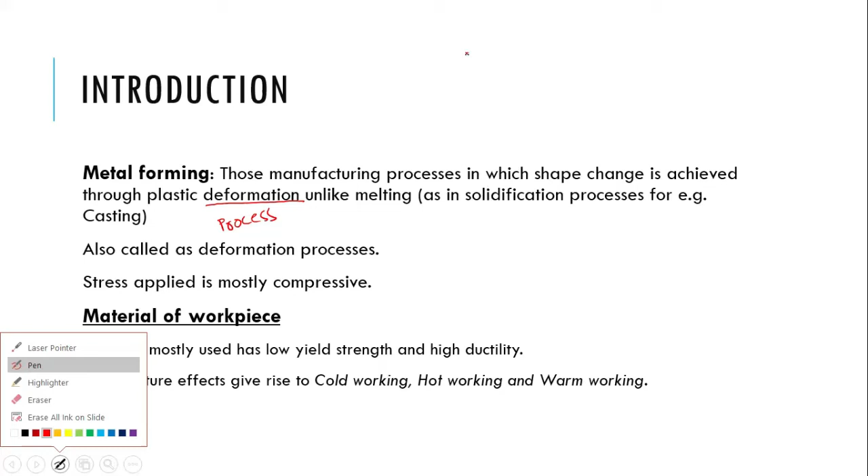In the previous chapter we were discussing shape change by application of temperature. In those shaping processes there were two methods for attaining shape change: by temperature, or melting, which we discussed as casting. The second method for attaining shape change is by plastic deformation, or by applying stresses or forces. So our second domain is the metal forming process or deformation process, in which we achieve shape change by application of stress or plastic deformation. That is why it is also known as the deformation process.

In this kind of shaping process, the stresses applied are mostly compressive in nature, while in some cases we have tensile stresses as well.

So what kind of materials are subjected to metal forming or deformation process? They are mostly highly ductile materials with lower yield strength. Highly ductile so that they don't fracture during deformation—if the material is brittle, it will not undergo plastic deformation, rather it will fracture. And lower yield strength so that it is easy for us to change the shape.

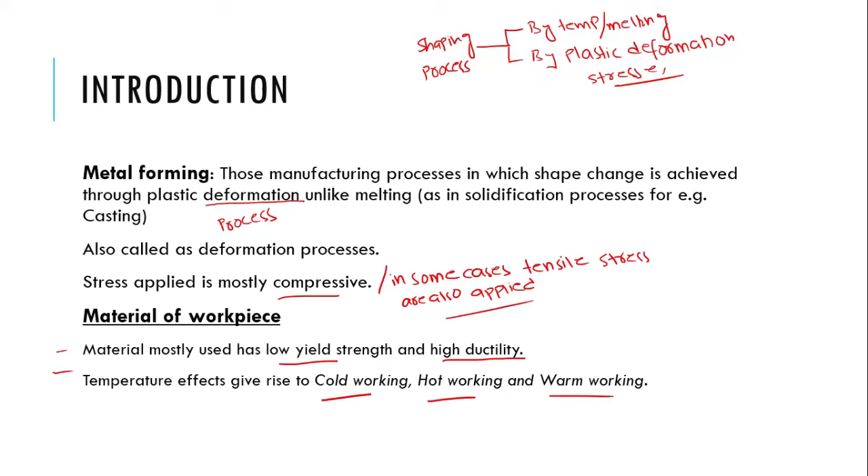Now if we see the metal forming process, it can be further classified into two types. The first one is termed bulk deformation. So the deformation process can further be classified into bulk deformation and sheet metal working, and there are further types.

So what is bulk deformation? It's a deformation that is produced in a bulk material, versus a deformation produced in a sheet, that is sheet metal. So what's the difference between bulk and sheet metal? The bulk is a material with low surface area to volume ratio, while the sheet metal is a material with high surface area to volume ratio.

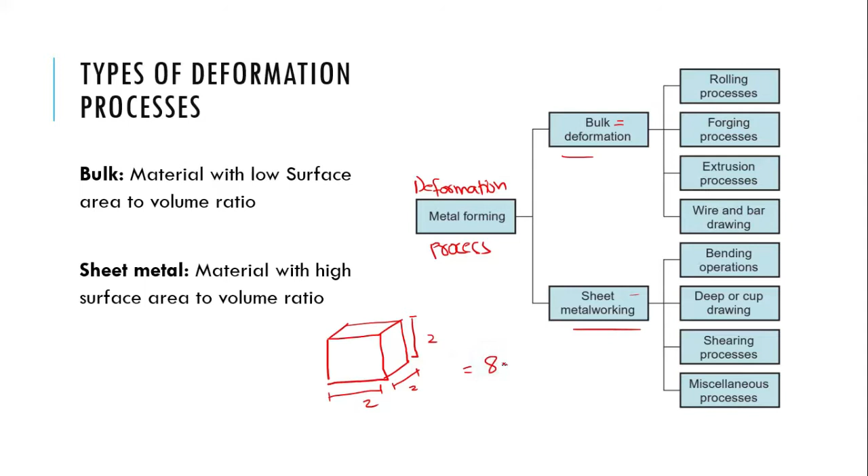What does it mean? Let's suppose you have a steel ingot—you know what an ingot is, a large bulk material in simple shapes. Let's suppose that is 2 meters on each side, so it will have a volume of 8 meter cube.

Then we have another sheet-like shape, let's suppose 2 meters on this side, 4 meters on this side, and 1 on this. So again we have 8 meter cube volume, but we know that this one has a greater surface area compared to the surface area of the bulk shape. So this is the difference between bulk and sheet metal.

The bulk has a lesser surface area for the same volume, while the sheet metal will have the greater surface area for the same volume. Although there are some restrictions on how thick the sheet can be, and we will see this when we specifically discuss the sheet metal processes.

So we have seen that the deformation process or metal forming process can be further classified into bulk deformation and sheet metal working. What is the difference between the bulk and the sheet metal? The bulk, which has the lower surface area to volume ratio, has a lower value, while in the sheet metal the surface area to volume ratio has a higher value.

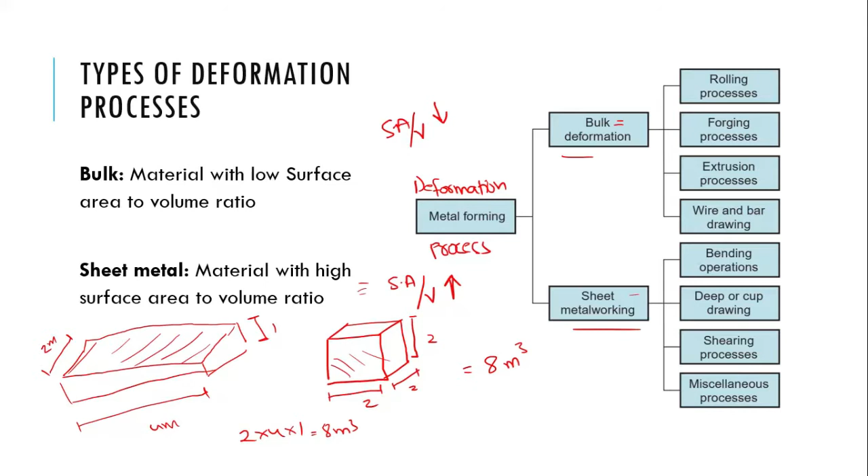Now if we refer to this chart again, we started here in the first lecture discussing manufacturing processes. In the processing operation, there are three processes. The first is where we shape the part, and there are two ways to shape it: either we melt the material and pour it into the mold, allowing it to solidify in a specific shape. That process is termed the solidification process. In chapters 10 and 11 we discussed casting of metals and further classification of casting.

Now we are moving toward the second type, the deformation process, which has further bulk deformation and sheet metal, and each of these two has its further classification. So now we will be discussing bulk deformation as well as sheet metal operations. I hope you keep track of this chart; it will help you summarize the subject in a single chart and remember the classification or interconnection between all the processes.

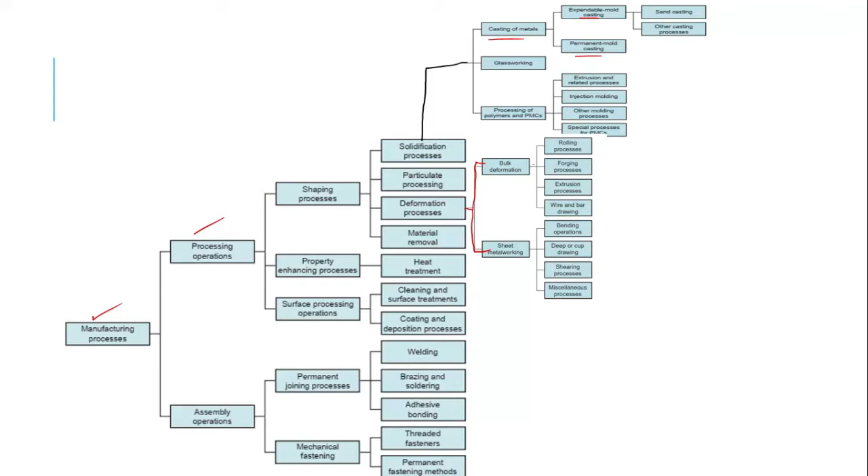Starting with the first type of metal forming, the bulk deformation: we have discussed what bulk deformation is, in which the deformation is produced on a bulk material, which has lower surface area to volume ratio. The other aspect is that they are used where significant deformation and massive shape change is desired.

In the sheet metal operation, there is not significant deformation or shape change, unlike the bulk deformation. So what are the types of bulk deformation processes? We have rolling, forging, extrusion, and wire and bar drawing. As we quoted in the first slide, in the deformation process mostly we apply compressive stress, so among these four, three of them apply compressive stresses.

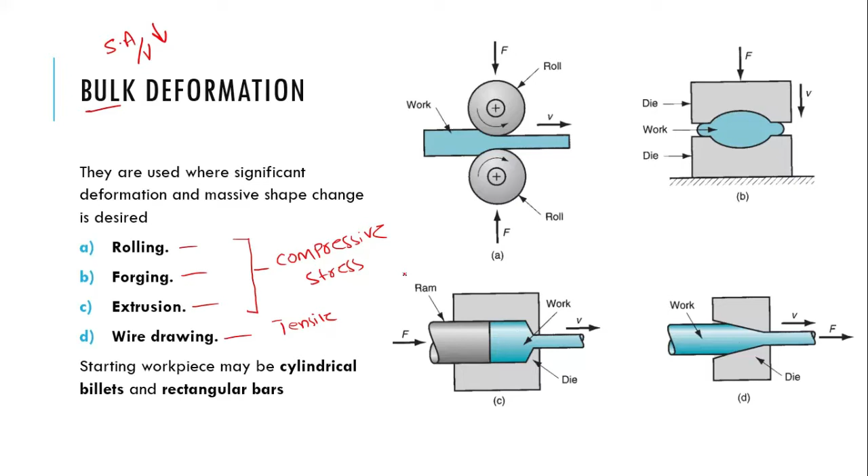The primary driving force is the compressive stress, while the last one, wire drawing, applies the tensile force onto the work part. So tensile stress is involved, but only in a few cases.

In bulk deformation, the starting material may be cylindrical billets, rectangular bars, or ingots, as we discussed earlier. This is the rolling operation, in which metal is squeezed between two opposite rolls. We have forging, where we have two dies and metal is compressed between them. We have extrusion, in which metal is forced to squeeze out of a die opening, taking the shape of the die. Or we have drawing, in which metal is pulled out of a die opening. We will discuss each one by one in the next chapter; in this chapter we will discuss some basics of all these processes.

So what is rolling? It's an extract from your course book. Rolling is a compressive deformation process in which the thickness of a slab or plate is reduced by two opposing cylindrical rolls or tools. The thickness of the slab is reduced by compressive stresses. The roll rotates so as to draw the work into the gap between them and squeeze it, with no other force involved.

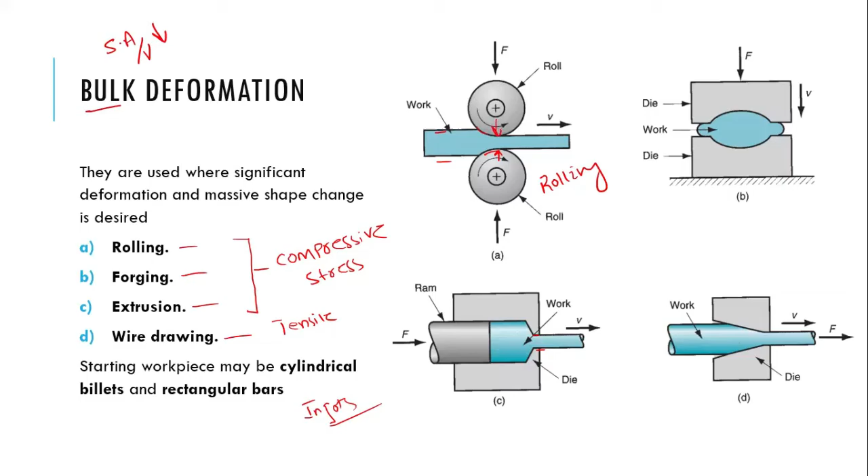These rolls pull the part into the gap, forcing it in using frictional force, and then applying compressive stresses onto the part to reduce its thickness.

The second one is forging. In this deformation process, the work part is forced or compressed between two opposing dies. We have the lower die, with the part placed over it, and the upper die which applies the stress. The lower die is stationary in most cases, while the upper one is movable. This is the work part, and this is how we perform the forging operation.

Again, all of these four processes can be performed as cold working, hot working, or warm working.

Then you have extrusion. As discussed, it's again a compression process in which the work part is forced to flow through a die opening, ultimately taking the shape of the die. So the metal is forced through the die opening, taking the shape of the die.

The last one is drawing. It's a forming process in which the diameter of a round wire or bar is reduced. The primary purpose of the drawing operation is to reduce the diameter of wires, which end up much smaller, and bars, which are comparatively larger in diameter. They are pulled through a die opening to reduce the diameter.

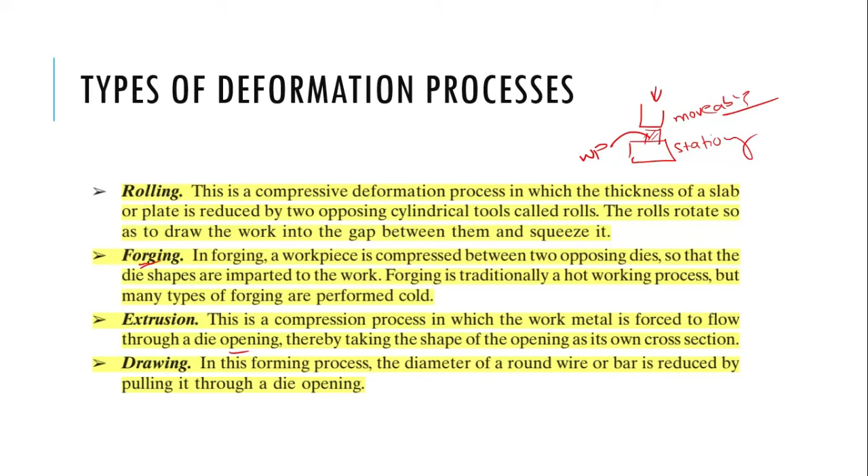Then there's sheet metal, the second branch of the deformation process. These are used where there is no involvement of significant shape change. They are metal forming and cutting operations of sheets, coils, or strips. There's not much significant shape change or plastic deformation involved, but there is some smaller amount of deformation along with cutting operations.

The sheet metal working operation is also known as press working, since hydraulic presses are mostly used for performing these operations. The product obtained from sheet metal work is known as a stamping. So I can call this one a stamping, or this angle iron is a stamping.

As there is no significant shape change involved, sheet metal operations are mostly performed as a cold working process, because they are mostly finishing processes in the deformation process. Cold working has advantages, like increasing the strength of the material, which we will discuss. That's why sheet metal working operations are mostly performed as cold working.

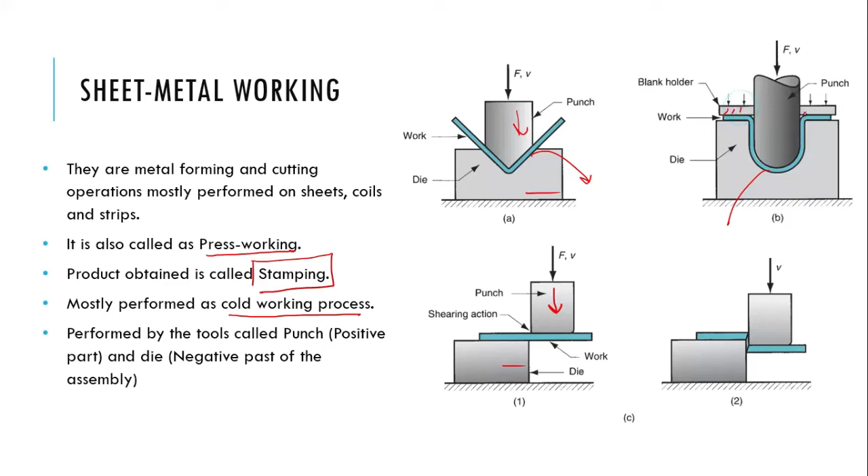Now here comes the stress strain curve. What is a stress strain curve? It shows a relationship between the change in the behavior of the material, or the deformation of the material, with respect to the applied stresses.

We know there are two behaviors of the material: elastic behavior and plastic behavior. Elastic behavior is one in which once the force is removed, the material will regain its shape. In the plastic one, it's a permanent deformation in which even if the force is removed, it will not regain its original shape. That means it is permanently deformed, or plastically deformed.

You must have seen that in the elastic region, the stress is directly proportional to the strain—that is Hooke's law. So if we start here, the stress will be directly proportional to the strain, and once the stress is no longer directly proportional to the strain, there will be a beginning of plastic deformation. That point is known as the yield point, the point from where plastic deformation starts.

It has an initial gauge length of L naught and initial cross-sectional area of A naught. When the force is applied on it, it elongates, so the gauge length changes, as you can see it is moving towards a fracture from here. So now the new gauge length for this specimen is L, while the cross-sectional area at this region is A.

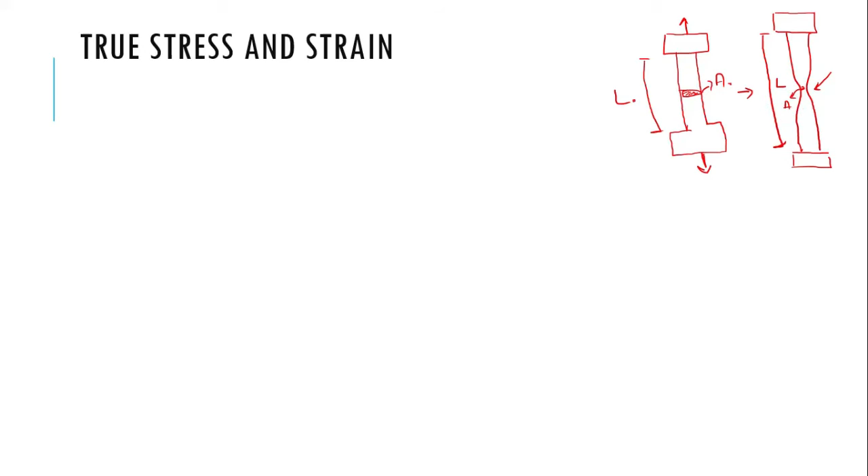So what is the engineering stress here? Stress is simply force per unit area. So which area is this, this one or this one? The engineering stress is the force applied per unit cross-sectional area, that is the initial area, the original area of the specimen on which we are applying the force.

But as we know, once the force is applied, up to the fracture point the cross-sectional area of the material changes. So the stress calculated based on the instantaneous cross-sectional area is termed as true stress. You can write it as force upon the instantaneous area, that is force divided by instantaneous area.

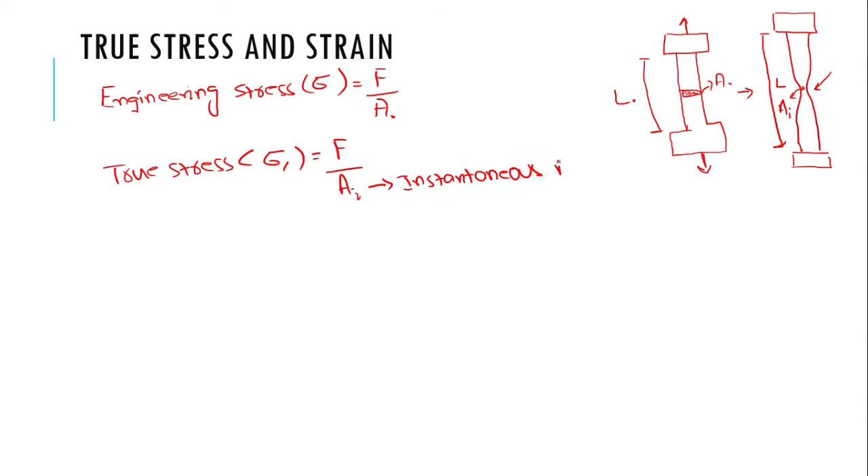If we observe it in the graph, let's suppose this is the strain, this is the stress. For engineering stress, it would be somewhat like this one. We have an elastic region, then the plastic region. But there's a possibility that for true stress we have a somewhat different value: it might go through the elastic region, then in the plastic region it will further increase, especially after the strain hardening point or UTS as we saw in the last slide. Why is that so? Because the cross-sectional area starts to reduce, and since the force applied is constant while the area is being reduced, the true stress increases further. So the stress calculated based on the instantaneous area is termed as true stress.

So what is the relationship between these two? As we know, true stress equals force divided by instantaneous area, but obviously the volume remains constant. So by the constancy of volume, we can say V equals initial area into initial length, A naught dot L naught, equals instantaneous area into instantaneous length, call it Li.

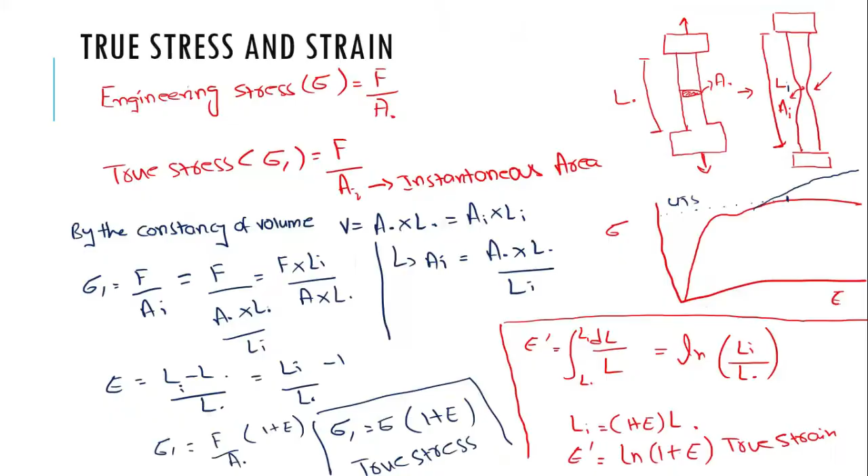So until now we have discussed two terms, the engineering stress and the true stress. Now we'll move towards the flow stress and average flow stress. So what is flow stress? In the plastic region, stress is no longer directly proportional to strain, as we discussed in the previous graph.

Let's draw a brief rough sketch of the stress-strain curve. We have strain here, stress here, and the elastic region, then the yield point, lower yield point, UTS, and necking, and this is the fracture point. This is UTS, and this is the yield point, and we have the elastic region, and this will be the plastic region.

So in the elastic region, we know it follows Hooke's law, that stress is directly proportional to strain, but that's not the case in the plastic region. Stress is not directly proportional to strain, rather it is exponentially proportional to strain. So we have stress equals directly proportional to strain exponent n, or we can write it as K times strain to the n, where K is the strength coefficient and n is the strain hardening exponent. If a material is more strain hardened, its value will increase.

But one thing we need to remember is that the stress and strain here are the values of true stress and true strain, not the engineering stress or engineering strain. Why is that so? Because we consider the flow stress in the plastic region, and that's why in the plastic region there's a shape change at every instant. That's why we consider the true stress and true strain. This flow curve was developed to define metal plastic behavior in cold working.

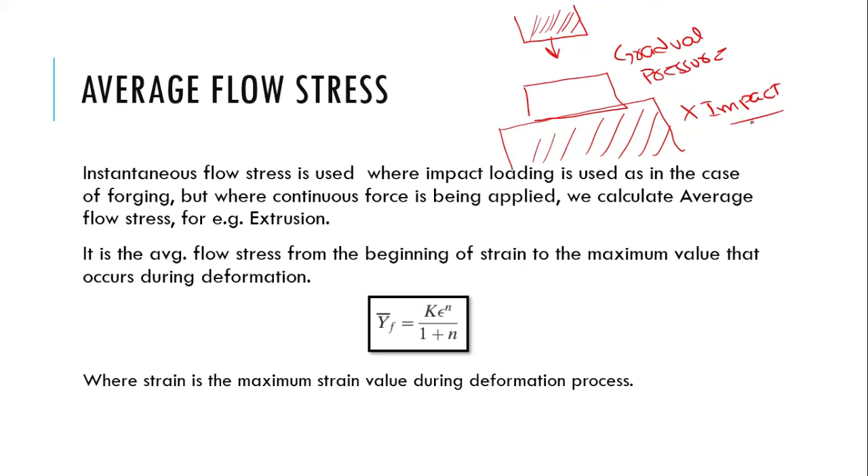It is not applying an impact. So obviously for this gradual pressure there will be a deformation in a gradual pattern. For that we consider the average flow stress. But if the load is impact in nature, we don't consider the average one, rather we consider the instantaneous stress. So basically the original flow stress equation is YF, flow stress, equals strength coefficient times strain raised to the exponent.

We integrate this from zero strain to the maximum strain, and we get YF equals that integral divided by 1 plus n. This is simply an integral of the flow stress equation, and this is how we get the average flow stress — the average flow stress from the beginning of strain to the maximum value that occurs during deformation.

The strain value used here is the maximum strain value during the deformation process, that is, towards the end of the process. What will be the maximum strain value in this case? When the material has been deformed completely into this shape, and it has been reduced to this final form, and we have achieved our final result — this will be the maximum strain of this material.

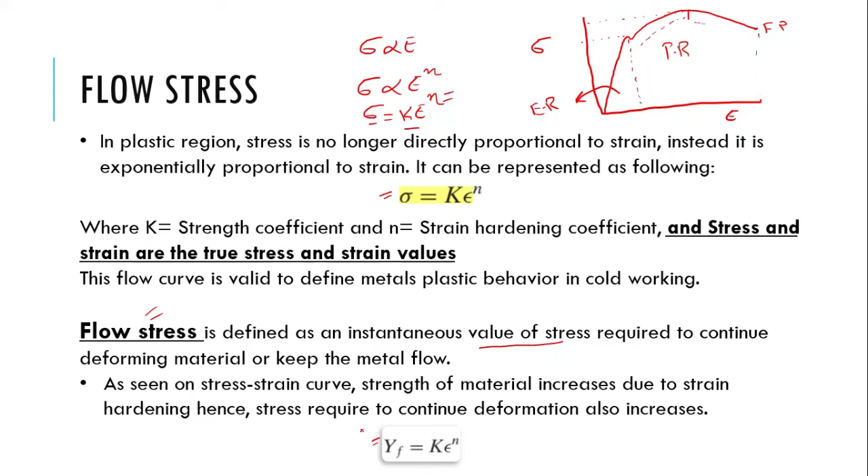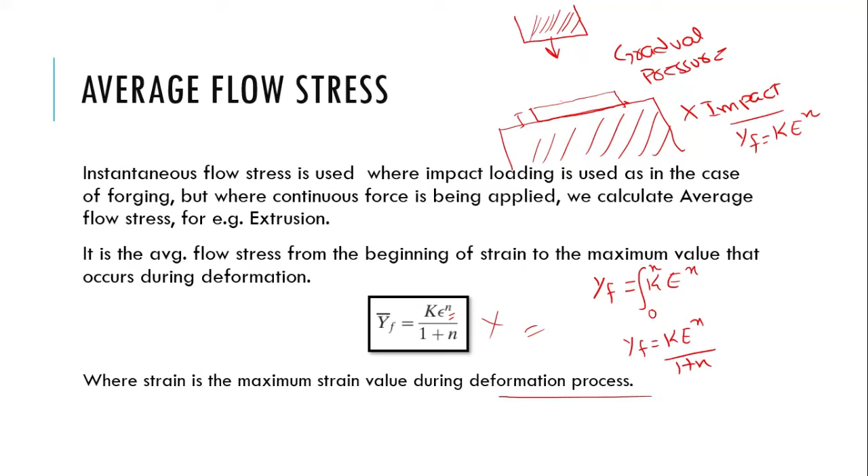Now, as we discussed in the beginning, the metal forming or deformation process — I'm writing it again so you remember they are the same, synonyms. The metal forming process or deformation process are of four types: rolling, forging, extrusion, and wire and bar drawing.

And these four processes can be performed in three ways. The first one is called hot working, or you can perform these four types of deformation process as cold working, or warm working. So all of these processes can be performed under these three conditions.

So what is cold working and why is it used, why is it preferred? Cold working is a metal forming process performed at room temperature. Our specimen is at room temperature, not in a heated form, or if it is heated, it is only slightly above room temperature — not very hot, and not even near the recrystallization temperature.

It is far away from the recrystallization temperature, so that is termed as cold working. If our specimen or the material is at room temperature, then that is termed as a cold working process.

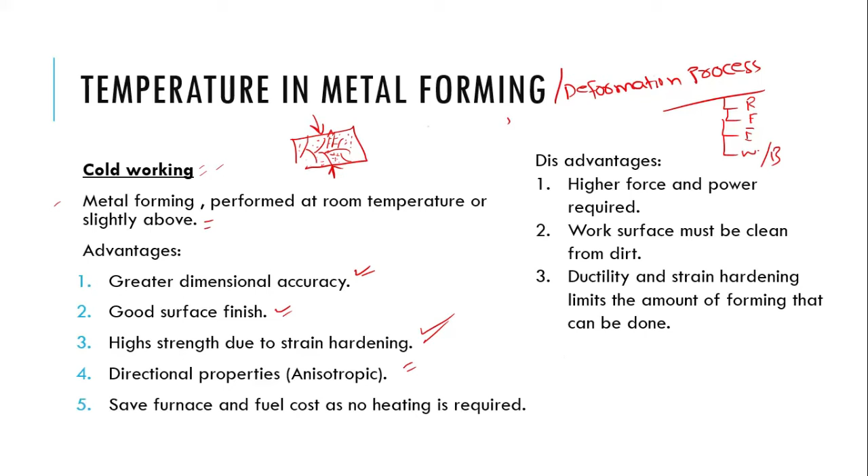There are two kinds of behavior in metallic materials. The first one is called isotropic behavior, and the other one is anisotropic behavior. It means, you can say, uniform in all directions, while anisotropic means it is directional.

What does it mean? Let's say if we have this specimen and I say it's an isotropic material, it means if I measure its tensile strength or compressive strength, in this direction or in this direction, it will give the same value. The material is behaving the same in all directions, while an anisotropic material will behave differently in different directions. It might have some value of tensile or compressive strength in the horizontal direction, or a different value in the vertical direction. So that is the anisotropic behavior.

And because of this cold working, our grains change. Let's suppose this was the original grain before it was cold worked. Now this is my specimen after the rolling operation, and this grain has been elongated like this. Now the layer of atoms is lengthier, longer than before. So it means atoms have more space to slide when subjected to force, while atoms have lesser space than before in this other direction to slide over each other.

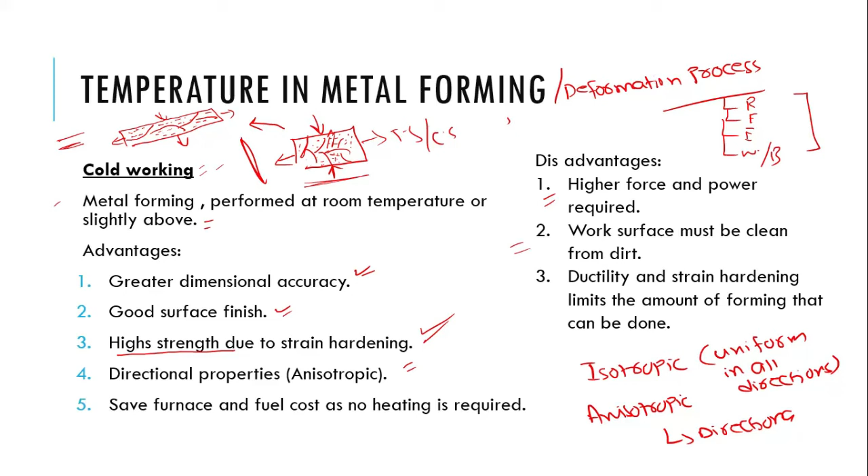If you have understood cold working properly, it won't be difficult for you to understand the other one, that is hot working. So what is hot working?

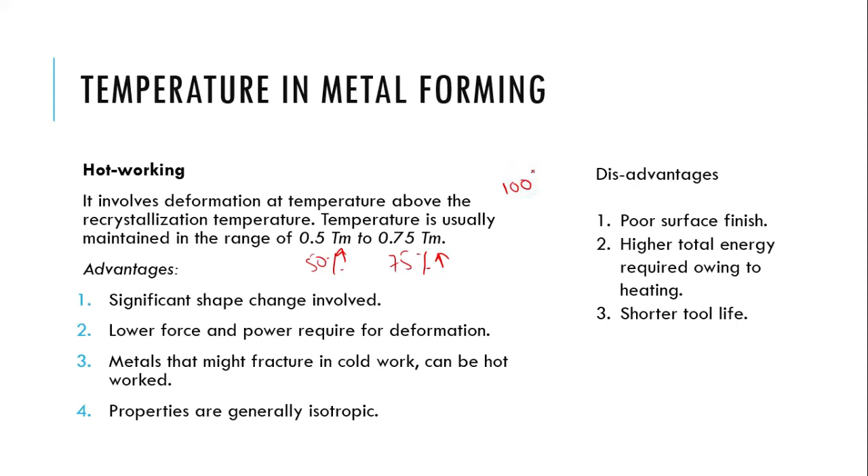In cold working, our specimen or work part was at room temperature or slightly above, while in hot working, the work part is at least at 50% of its melting point temperature, up to 75% of its melting point. Let's suppose a material melts at 100 degrees centigrade, so for hot working of that material, it should have a temperature between 50 degrees centigrade to 75 degrees centigrade. We don't exceed beyond this limit.

Why is that so? Because when we deform the material, there's heat generation involved in the deformation as well. So if we heat the material at 75% of the melting point, plus there's heat generation due to deformation, there's a possibility the material might reach the melting point temperature and start to melt. That is not our objective.

That is why we heat it from 50% of its melting point to 75% of the melting point. And why do we heat it to such a high temperature? To achieve the recrystallization temperature. So what is the recrystallization temperature?

In the material we have grains or crystals which have some specific order of atoms. So when we heat the material up to a certain temperature, we provide enough energy to those atoms that they break away from these bondings and rearrange themselves. We provide enough energy so they can rearrange, so we can deform them in whatever manner we like, without having to exert much force to overcome strain hardening. That is the purpose of heating to recrystallization temperature.

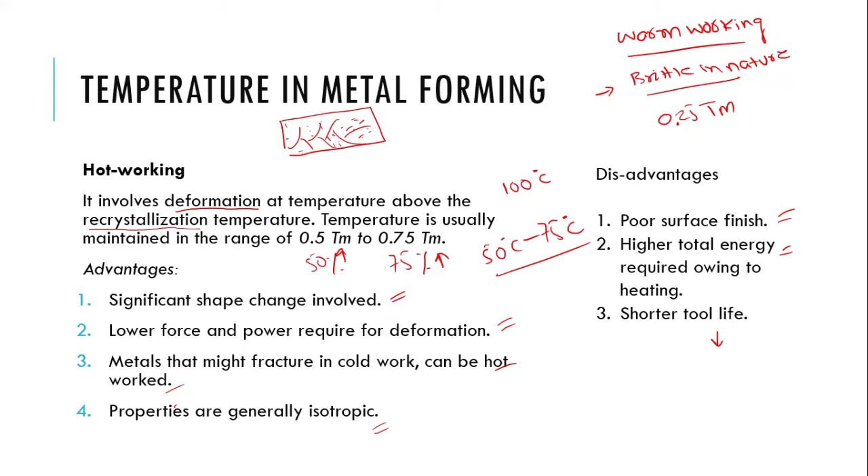So we have clarity over the hot working and the cold working. The last one is the warm working. If a material is brittle in nature, it is rarely used, and if you directly perform cold working on such material, there's a possibility it will fracture. So we slightly heat it above room temperature, about 0.25 of the melting point, just enough to soften the material so we can perform the metal forming processes. That is warm working. So that's all for the temperature ranges in metal forming: hot working, cold working, and warm working. Now the next topic is the strain rate and strain rate sensitivity.

But before going into that, as I told you, recrystallization means we heat the material, providing enough energy to the atoms so they can rearrange themselves. This occurs in hot working. How do they rearrange themselves? Via atomic diffusion, that is rearrangement of atoms in the crystal lattice, to remove dislocations and defects. There are some terms you're not familiar with, like defects in solids and dislocations, which you'll learn in materials and metallurgy. For now, just take recrystallization as: we heat the material, providing enough energy during heating that the atoms are able to rearrange themselves, so the effects of strain hardening wear off, or are removed.

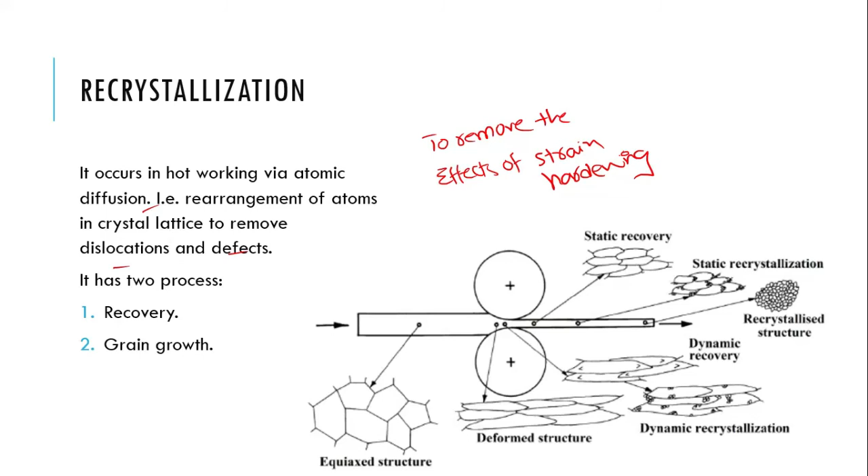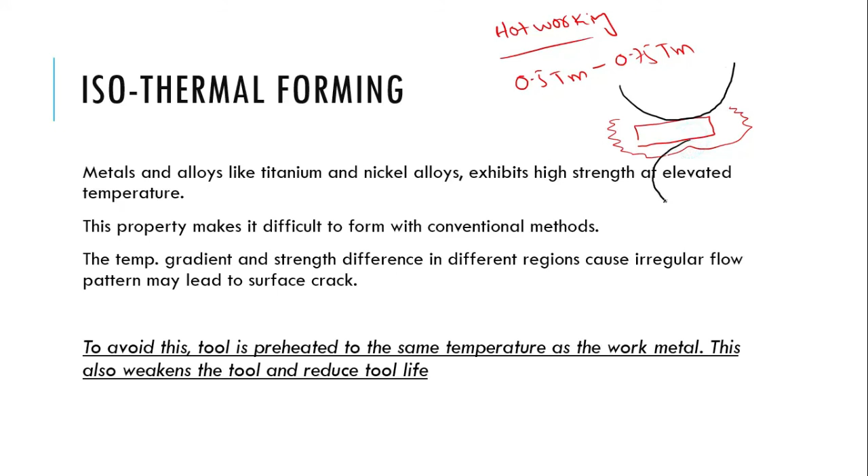Now there's another thing called isothermal forming. We have discussed hot working in metal forming processes. What was hot working? In which we heat the specimen from 50% of its melting point to 75% of its melting point. So let's suppose this is my workpiece, and it is really hot, and it is undergoing the rolling operation. These rolls are compressing this hot material. This is really hot, let's suppose at 700 degrees centigrade, but the tool is at room temperature, maybe 25 degrees centigrade, or even 70 degrees centigrade because of the hotter environment.

So because of this sharp temperature gradient between them, there's a rapid heat transfer from the material to the tool. There are two primary disadvantages of this. The first is it reduces the tool life, as we studied in the disadvantages of hot working. The second, because of the sharp rate of heat transfer, the material or atoms rapidly crystallize. There's rapid crystallization, and a fine grained structure starts to form. So the plastic deformation pattern differs within the same material, in different regions, and that is why it is not desirable.

So what we do is also heat the tool up to a certain temperature. If not 700 degrees centigrade, at least let's say 500 degrees centigrade, closer to the temperature of the workpiece. Our primary purpose is to reduce the temperature gradient, so the rate of heat transfer also reduces. Although this reduces the tool life as well, the plastic deformation occurs smoothly.

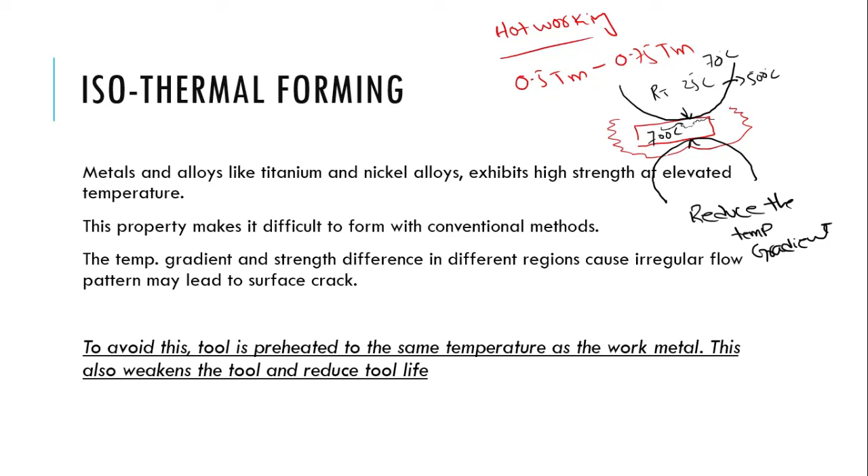Now the next topic in this chapter is the strain rate sensitivity, and this comes into play in the case of hot working. As we know, in hot working, the strain hardening is theoretically zero, meaning the material is not strain hardening, so with strain, the strength of the material is not increasing because it is in a perfectly flowing pattern. But in the case of hot working, the additional factor that comes into play is the strain rate sensitivity, that means at what rate the strain is being produced.

The strain hardening coefficient becomes zero, so the required stress to deform plastically is gained here. As we know, the flow stress equals K times strain to the exponent n, and in hot working, n becomes zero, so that exponent term becomes 1, meaning flow stress equals the strength coefficient of the material. That means there is no increase in the flow stress required to produce further strain, no incremental flow stress required for producing the plastic deformation.

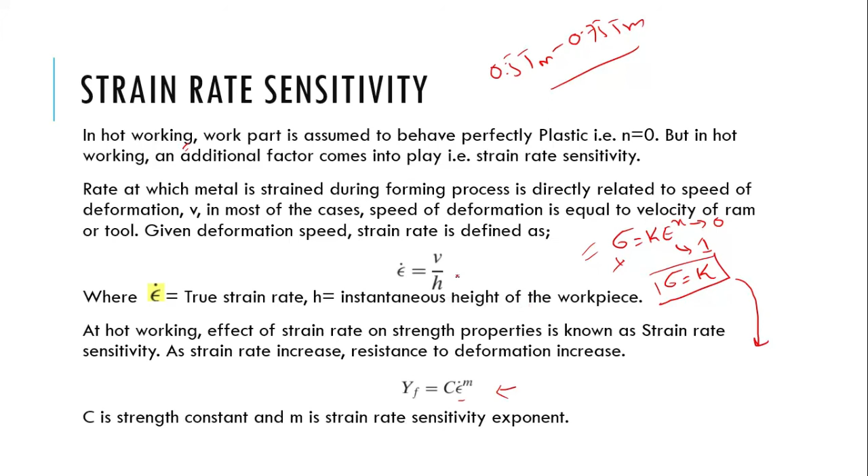So as we know, that equals K times strain to the power n. We reduce this flow stress equation to a new equation, where this is the strain rate, equals V by H, where V is the speed of the tool at which it is producing the strain, and H is the instantaneous height or length, whatever dimension we are reducing or changing. So the flow stress equation is reduced to YF equals C, that is the strength coefficient, same like K, but measured at strain rate equals to 1.

So if the K value is measured at strain rate equals to 1, then that becomes C, known as the strength constant, and here M is the strain rate sensitivity. What is the physical significance of this M? It tells us how much sensitive the material is to strain rate.

So at higher temperature, the value of M increases, which means at higher temperature materials are generally more sensitive to strain rate, whereas at room temperature, M equals 0.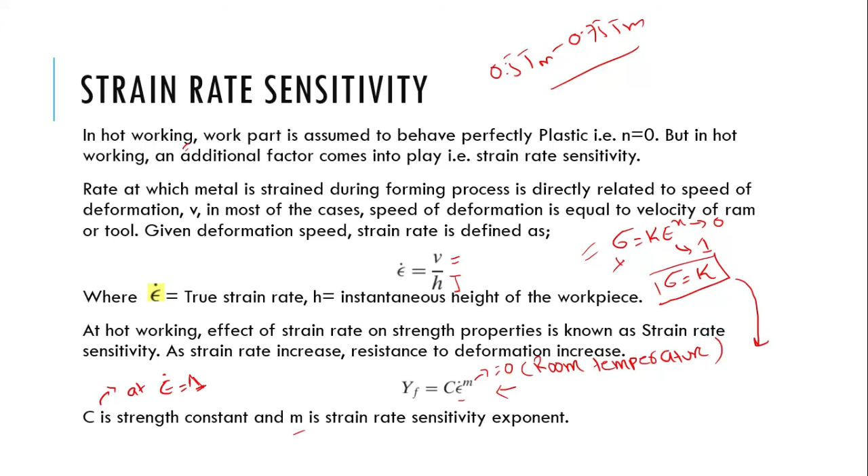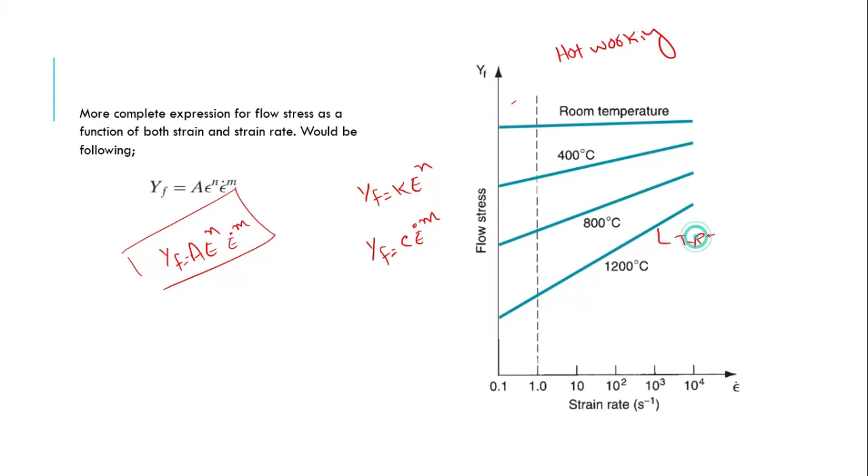But as soon as we start to increase the temperature, because of the strain rate sensitivity, although strain hardening isn't happening theoretically, due to the strain rate, the requirement of flow stress increased in the material. This is termed strain rate sensitivity. There are many factors to why it occurs, depending upon the type of material we are using and the temperature range.

For now, this is just a concept I want to deliver, but this is the end of this chapter, fundamentals of metal forming. In the next chapter, when we deal specifically with rolling, forging, extrusion, and solve design problems, we won't be considering the effects of strain rate. For the sake of simplicity, we will base our calculation on the simple flow stress.